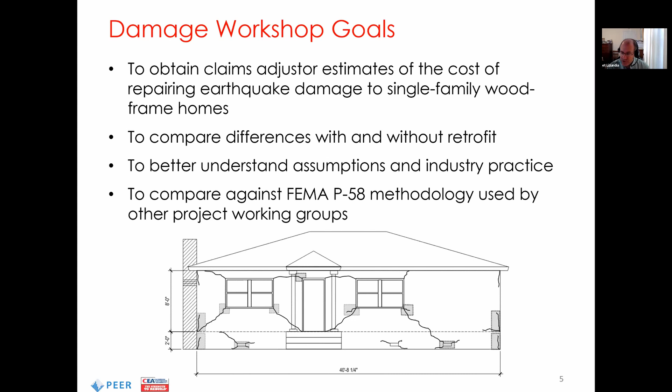We wanted to compare the results if the building had been retrofitted versus not retrofitted. And we wanted to drill down into understanding what kind of assumptions they use, what the industry practice is among their colleagues. And ultimately, we wanted to compare their results against the FEMA P58 methodology, which is underlying the approach that we took analytically.

So in terms of what I'm going to cover this morning, I want to review the scope of the study, what all was involved. We had a key workshop online where we brought everyone together and we talked about issues of differences, and we made decisions on how we were going to address those. Then I'll show you results of estimates and then draw some conclusions and make some recommendations.

So let's first talk about this package, the damage description package that we issued. These were the rules of the game, the instructions to adjusters on what we wanted them to do. And this document grew and grew as we delved more deeply and had more reviews of people.

It covered the buildings, and I'll show you those in a minute, that we were estimating, the damage to those buildings, the different scenarios that were considered, and a very detailed set of assumptions to kind of establish the context and how we wanted things structured.

CEA suggested that we use the Verisk platform, which is common in the industry. We're not endorsing that in any way, but it provided for ease of use and efficiency and commonality amongst the estimators and adjusters so that they were all doing a similar approach.

This all got combined into several things. One was this 106-page damage description package. We also had a questionnaire that we did through Excel, and then we gave them the starting point of Xactimate files to save them time so they didn't have to build the basic geometry of the building in there.

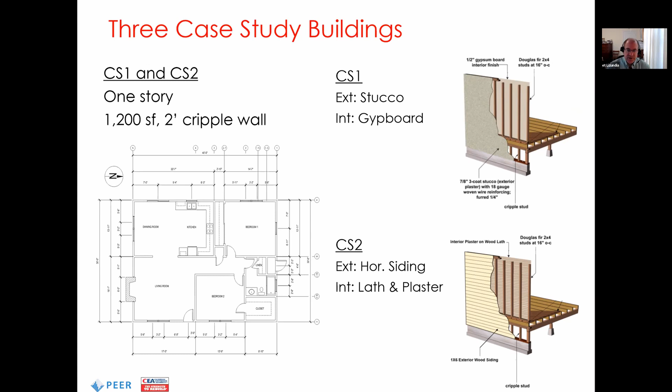We could, though, compare directly other things. So the third building was 2-story, kind of similar in terms of the basic footprint. We added a garage to it. It's got more modern T111 plywood on the outside, and interiors gypboard. We also made it a tall cripple wall to see if that would produce any differences.

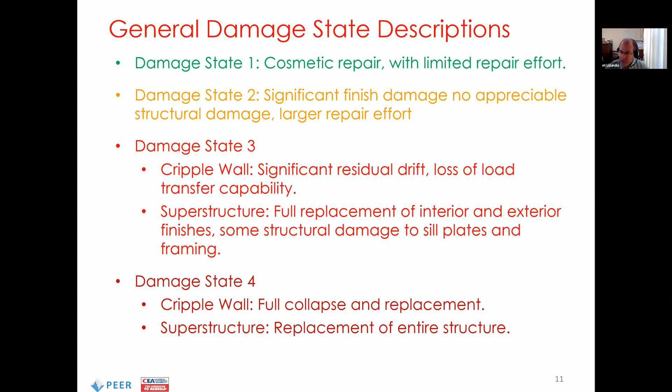For each of these case study buildings, we created 4 damage states, deliberately colored in ATC 20 post-earthquake evaluation colors. Damage state 1 has damage, but it's something that would receive a green tag—cosmetic repair, fairly limited work. Damage state 2 is more significant; you might receive a yellow restricted use tag. We've got a lot of finish damage at that point, but nothing really significant on the structural side. Damage state 3, there's a big jump—that's where we really started having significant damage to our cripple walls. We've got permanent residual drift, we're worried about gravity load carrying capacity, and substantial damage is occurring in the superstructure as well. Damage state 4 was defined as so bad that we're going to replace the building. So you can see how they step up.

With each of those abstract descriptions, we then had detailed pictures in several different ways. So we have these crack maps and spall repair maps where we define the length of cracking, the amount of spalling happening on each exterior facade. We have similar descriptions for interior partition damage—what happens to the floors, walls, tile, MEP systems, a whole series of categories. We tried to include photographs, usually extracted from the literature, to illustrate the extent of how bad that damage was or wasn't.

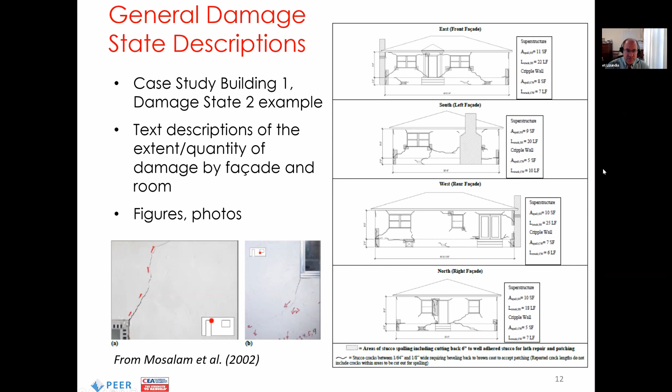So we had that all assembled. We sent it out to our adjusters, and we convened a call with them after they'd had a chance to dip in and take a look and get a little overwhelmed by how much they had received. We took their questions, tried to answer initial ones, and then they were off and running. They prepared their initial estimates and sent them to us, and we poured over them—looking for issues, commonalities, questions, things that could have been clearer, areas where there are differences in the approaches that each adjuster and their firm takes. We had a very successful workshop with a good group discussion amongst a diverse audience on how to address those, and then we kind of redid it.

So there was another round after the workshop with a much more detailed damage description package that described the decisions that were made and how we wanted them to address that. And then we got a second round of estimates back, and we again poured over those, organized them, and processed results.

The scope—I mentioned Chris McDermott was an advisor. We had 10 adjusters who do earthquake damage and many other kinds of catastrophe damage estimating, sort of a powerhouse group. These were, quote unquote, volunteered by their firms with nudging of CEA, and we're very grateful for that—I could not have done any of this without them. In terms of permutations, if we have 3 kinds of buildings, retrofit and unretrofit, and 4 damage levels, in theory there's 24 scenarios we would have gotten estimates on, but some of them are awfully similar to one another, so I combined them to reduce the effort, though it's still a dramatic amount of work.

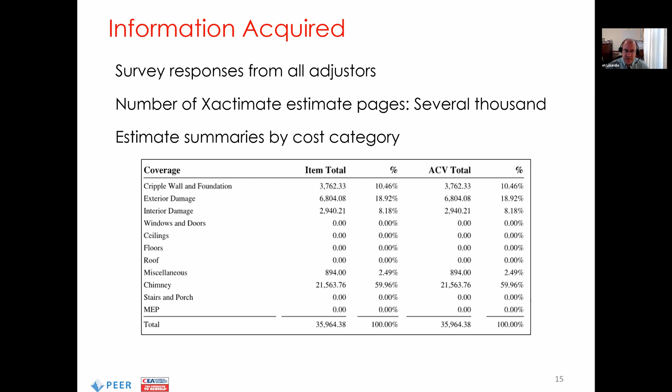Once we had all that information, it was a little staggering. The Xactimate report files are on the order of 30 to 50 pages, depending on the scenario, for every one of those scenarios for every adjuster—so it's thousands of pages. We made a decision early on with Chris's help to combine things into categories that helped us summarize and condense the several pages of detailed work the adjusters were doing. So we had a cripple wall category, an exterior and interior category, windows and doors, ceilings, floors—you can see the list there. That was more helpful for reviewing things between folks rather than at the detailed, 40-page line estimate level.

So what did we find when we brought everybody together and looked at that first round of things? What we saw is that there were some places where our descriptions were on target, no issues, everybody agreed.

There are other places where we decided if you've got stucco damage on the outside, then we're going to take it off, and the water barrier underneath that's exposed is going to be completely replaced and patched. Maybe even more significantly, if there's tile somewhere, we're going to assume it can't be matched, and that room gets full replacement, even if only a portion was damaged.

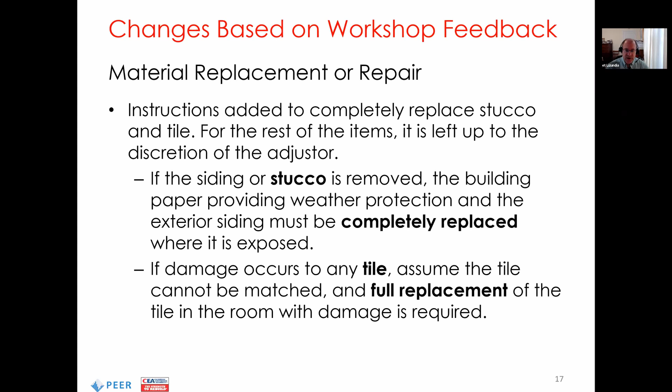That is kind of general industry practice and has a big impact on costs. So even if structurally there's not a lot of damage, the cost of tile replacement can be fairly significant. Leaning cripple walls is a very key aspect to many areas of this project.

We had a lot of survey questions about what would you do in this situation, what would you do in that situation. It turns out there is not industry consensus on this, and many adjusters' general approach is to defer to a structural engineer that their firm hires when the damage is significant, and that made things difficult to cross compare.

So we made a decision to direct them to make certain assumptions. We added additional language about what to do in these three damage states to basically tell them what to assume in terms of the repair.

We also had instructions—as a practicing structural engineer, I routinely assist and review cost estimates for my projects. Those aren't buildings necessarily that are built yet; this is an estimate in the future. So typically costs are escalated to the midpoint of construction.

This turns out to be a very unfamiliar concept in the claims adjuster world. They just don't use escalation, it turns out. They are doing things in real time. They might have multiple estimates as more information comes in, and the costs are done at current dollar values. That was news to me—I didn't realize that was the approach, and it shows a pretty fundamental difference between industry groups in how they deal with inflation and escalation.

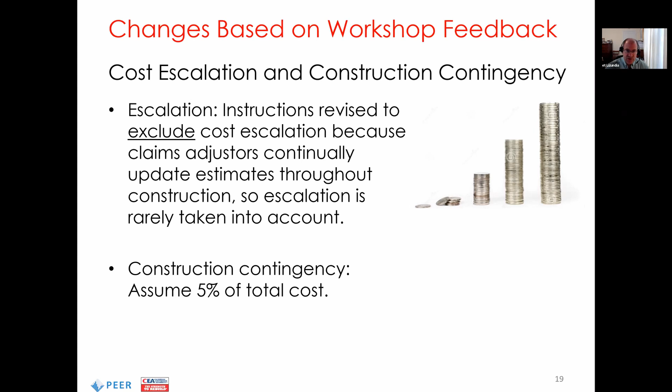We also made decisions about what contingencies to assume that might come up with changes when you get into construction. We had advice about how long the building was going to be out of commission, depending on the damage state, ranging from 2 weeks to a year—a pretty dramatic difference between damage state 1 and 3, for example.

We made assumptions, or directed them to certain things, about architect and engineer design fees, plan check fees, and special inspection, which is pretty rare for a house—some jurisdictions do a little bit. So those were imposed on them. Originally we had asked them to tell us their assumption, and we didn't get a lot of good response on that, so we ended up deciding to define it.

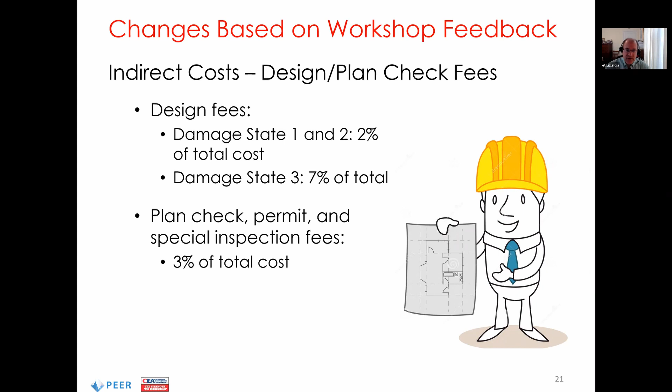A big thing that has grown in California over many years is the cost impact of dealing during repairs with lead paint and asbestos, and I did not appreciate how significant this has become. So we had a lot of debate in the workshop about how to do that, and we ended up making some decisions related to the different damage states based on their experience and what they see.

So these are weighted averages. They certainly see way higher values in some extreme examples than, way more than 10,000. And then they see less, but typically they're dealing with this, and this has become a growing challenge, particularly in California.

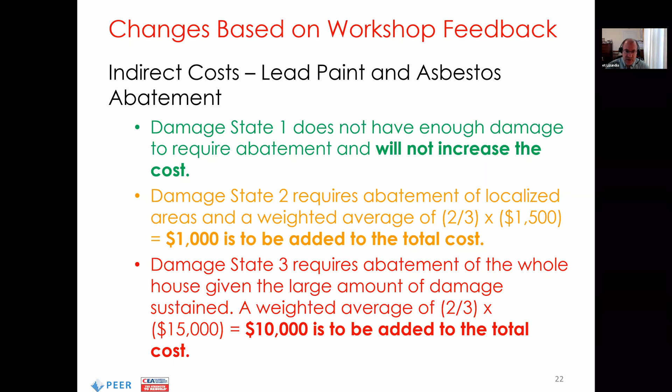We decided in the end to exclude what's called coverage C and coverage D in the industry—personal property and ALE—for simplicity.

Okay, so those, and there were more—that was sort of highlights of decisions we made. But let me talk about results next.

So the first thing that we did is we looked, in my office with the folks who were helping me, at what we got. Despite all of these review steps and instructions, and we had cheat sheets in the damage description package about where to put things, this is hard. I was impressed by how tough it is to be an adjuster, and the challenge and the really intense detail that the programs and the work they do go through about all the very specific choices.

So when you step back and try to aggregate that, and say we wanted you to put that particular thing in miscellaneous rather than indirect, that wasn't necessarily how they did it.

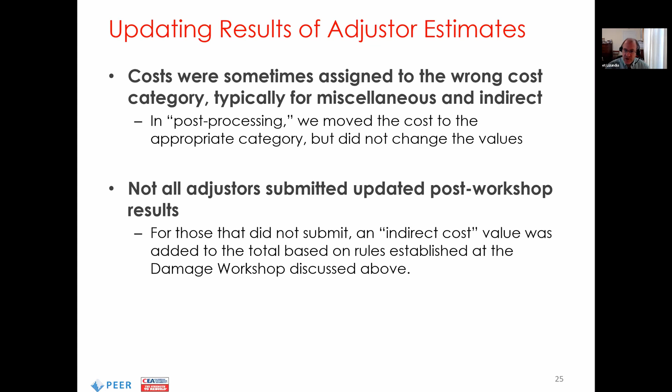So what we did, just to make things more comparable, is we moved values from one place to another, depending on how we had originally intended the value to be located in which category. We didn't change the number, so the bottom line total is the same—it just made it easier for us to compare individual categories. Not everybody resubmitted, so we adjusted the ones that didn't resubmit values to include any decisions on specific things they needed to do with indirect costs in the end.

Okay, so with that being said, here's some comparisons. CS1, that's case study building 1, the 1-story house. You can see damage state 1, DS1, starts at $15 a square foot—these are in last year's dollars—and the replacement value of that house is about $240 a square foot. So not surprisingly, the more damage you have, the more it grows, and it grows fairly significantly with each damage state.

So we actually kind of liked the way we had divided up the damage states. We got a nice variation that really reflected meaningful differences. There are some differences on a dollar per square foot basis between the 3 buildings, but not a huge amount—that was interesting, that even though we had all these variations at a bottom line aggregate level, they're not dramatically different. You can see on the bottom row the mean values of all the adjusters who worked on a particular building type, what they came up with.

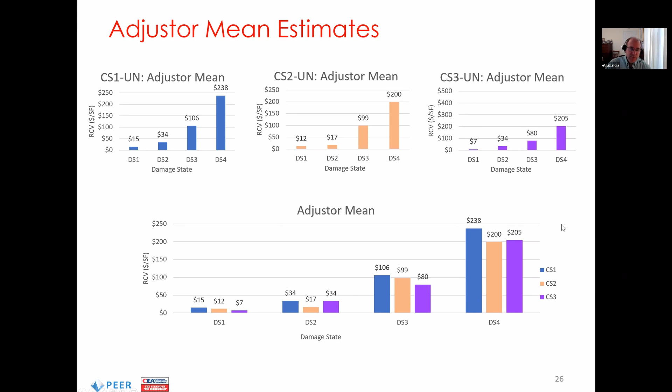So another really important thing we did was compare the differences between what the adjusters were submitting to us versus the FEMA P58 methodology. Dave Welch and Greg Deierlein, who we're going to talk to later, were kind of in charge of that effort. You can see on the right the mean and mean plus-or-minus 1 standard deviation of their work, and how that nicely envelopes the adjuster values. Pretty impressive, really, how similar the ranges were between these, and quite reassuring to us that we were on the right track.

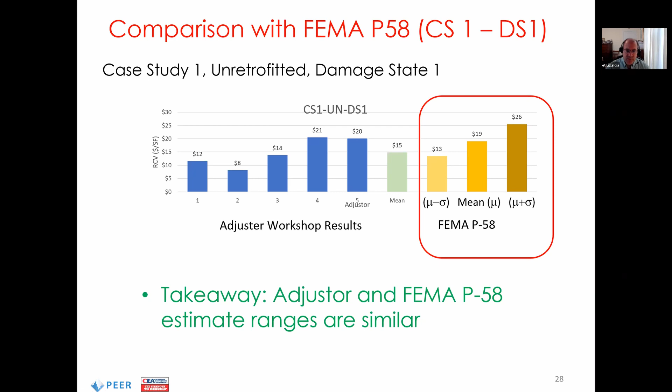So we have coalesced all that information, put it together in data that will be available to any researchers who might be interested. It has 4 primary Excel spreadsheets that compare a whole host of different things and have histograms and summary tables, more information than is in the published report that will also be issued. For those who might want to dig into that, it's available. By prior agreement with the insurers it's anonymous, so only I and my staff know who was who, and we're not giving out the Xactimate files for similar reasons, but there's still a ton of data anybody could dig through.

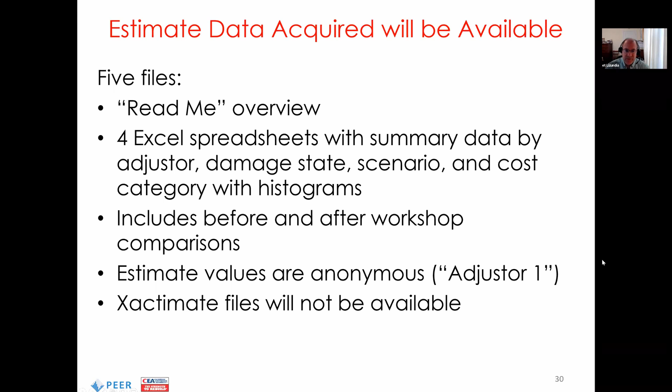So, conclusions and recommendations I'll wrap up with.

In terms of conclusions, as I mentioned before, reassuringly and sort of impressively, adjuster estimates and the P58 were awfully similar. You really have to have detailed estimating assumptions. I thought we were super detailed, and then we had the workshop, and despite all these reviews of a whole host of really talented people, we still needed more. The adjusters were always wanting more to make their job more rigorous. So it's a testament to their professionalism, but it's also a lesson that different assumptions can make a big difference.

I came away feeling that the world I typically live in as a design professional and the cost estimates I do, as opposed to what the claims world does, as opposed to what academic researchers do and what catastrophe modelers do—it's almost like we're all talking a bit of a different language with different terms. The fact that some adjusters had never even heard or used the word escalation was kind of amazing to me, and there were other things. So I think a project like this highlights the commonalities and the differences, and helps each of us understand one another better.

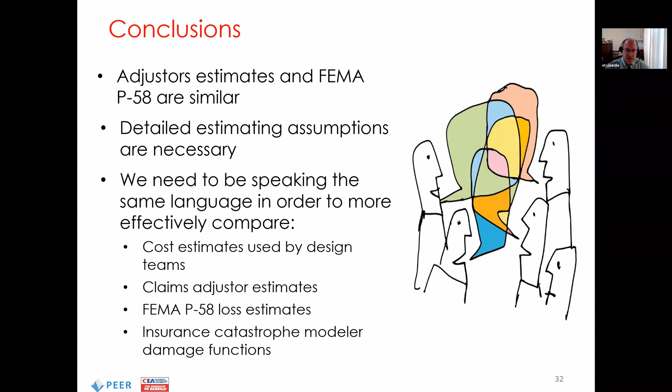So you got to be specific. Working with the modelers who were on the online workshop, we decided to exclude demand surge—the kinds of things that change when there's a lot of damage happening after an event. Catastrophe modelers, as I understand it, do that separately anyway.

So we took that out as an assumption. Things that will occur in some small subset of buildings, like legal fees, radon, and mold, we also excluded. So in some ways what we have is a bit on the lower bound side, but you can't cover all of these different permutations.

In terms of recommendations, we felt the only real significant area where we wanted to drill down, and where we were able to use the adjuster values to do that, was with the lath and plaster estimates we got. In our report and the work we did with Greg and Dave, we were able to cross-compare adjuster values on lath and plaster versus gypsum board. That was a great benefit, as it got specific on how they were going to deal with that across many permutations.

Again, and I keep saying this, but I want to say it once more: when you do this, you need to be really, really specific about what you're assuming. Over and over it was brought to bear that you just can't do things without having this be clear—it will be apples to oranges by definition. So when you look at future projects, or as people are crafting projects, I really want people to have 100-page descriptions of assumptions, because if you don't, you're just kidding yourselves about whether you're actually getting good information.

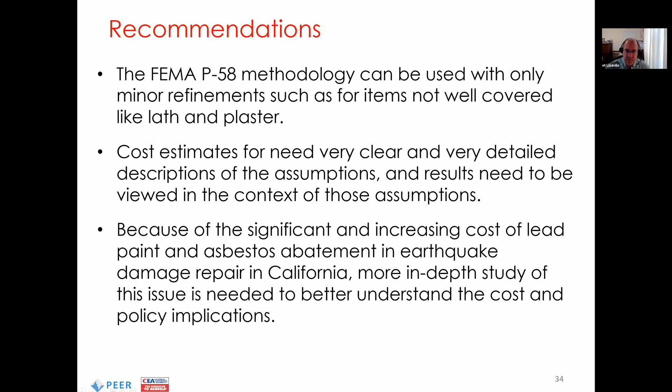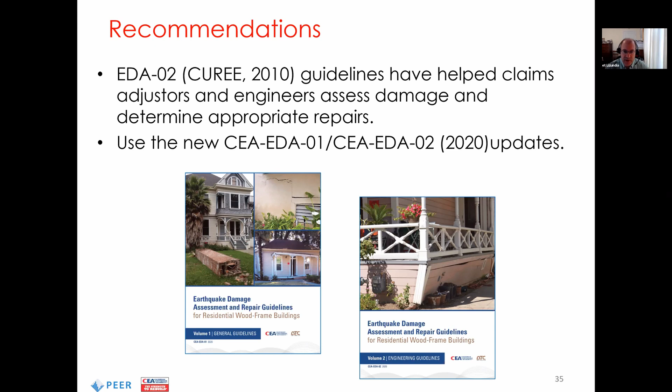I'll put in a plug, but it's a well-deserved one. One of the rules of the game for our instructions was that the EDA 2 guidelines that CUREE produced a while back are definitely industry standard practice, and we said follow that wherever possible—that's your guide. That's been out there a long time, and a recent ATC project updated these into two wonderful new documents. So those will now become the new industry standard, and we definitely encourage that.

Remember, I mentioned we couldn't get real agreement amongst the adjusters on how they dealt with leaning cripple walls—at what point they repaired them, at what point they jacked them, at what point they replaced the cripple wall itself with the building up on shores, and at what point it was so bad they ended up having to replace the whole building. So that's an area where more detailed work between engineers and adjusters needs to be done.

Finally, other people have said this for sure, but I really believe it's true: trying to get it to happen is the challenge. Insurers have payout information that is, of course, proprietary and of great value to them. But if we had that in some anonymous way—what's actually paid out—you can imagine how valuable it would be to improve FEMA P58 or similar projects. If there's a way we can work together to share some of that information, I think it will benefit everyone, leading to better research, better analysis, and better pricing of insurance policies.

So I will end here. I think I'm on time, and I'll turn it over to our next speaker.

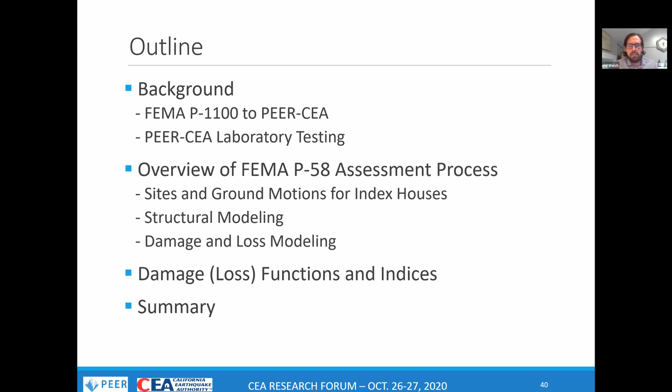So just as a brief outline, I want to transition a little bit between the FEMA P1100 document serving as the retrofit criteria for this project, and then moving into the objectives of the new project. My portion of the talk will go over the FEMA P58 process, as Bret somewhat introduced when discussing the workshop. I'll show this more graphically as I go through, to give a bit of the background behind this whole process. Unfortunately, I won't be able to get into every single detail, but we do have a 400-page report that has every input value and assumption made for all this work, so anyone interested in the nitty-gritty can obtain that once it's published in the near future. After going through that, I'll turn it over to Greg, and he'll talk about some key results and findings, and then conclude our talk.

As Kelly mentioned yesterday when talking about the ATC 110 project and the FEMA P1100 document, this represents the engineering solution to the crawl space vulnerability problem, and is a stepping stone where we have the PEER-CEA project, aiming at quantifying performance as an intermediate step towards the bigger picture of implementing more of these retrofits and reducing the vulnerability of these structures. One key difference between these two projects was that the development of the retrofit guidelines focused mostly on a very high seismic demand, probability of collapse at the MCE level. This used the FEMA P695 procedure, doing incremental dynamic analyses and the appropriate adjustments to estimate the probability of collapse at the MCE level event. Then in addition to probability of collapse at the MCE level, we considered R factors with different considerations rather than just the nominal P695 collapse probability.

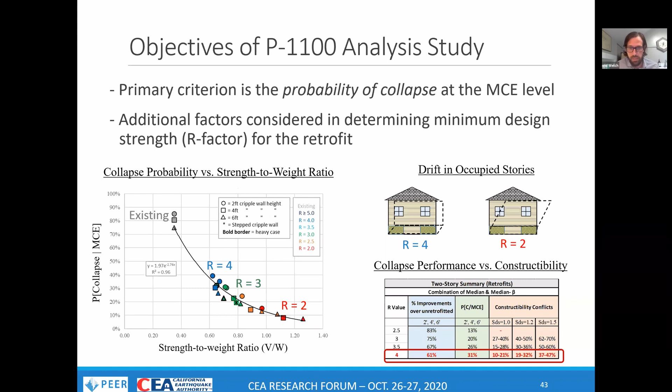This relied heavily on understanding shifting drift into occupied stories, and importantly, the constructability of these different retrofits, trying to make a balance between the collapse reduction and how many of these retrofit details will actually fit in most houses. So that's just a little recap.

Okay, and then so now, as everyone here for the last two days knows, for the new project we're attempting to develop loss functions to quantify the benefits due to retrofitting in terms of reducing the risk of collapse and economic losses. The main question shown in the top bubble is trying to understand how the removal of the cripple wall vulnerability due to retrofit changes the risk of loss.

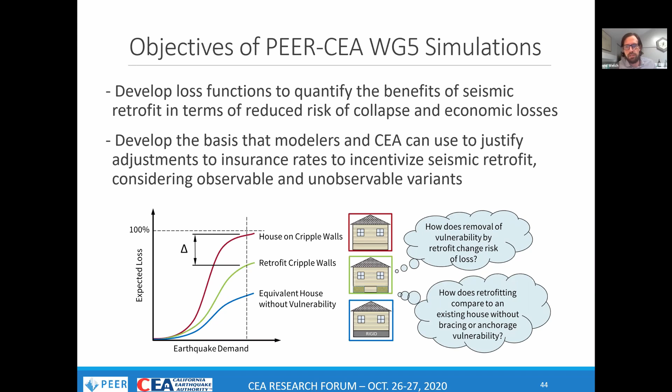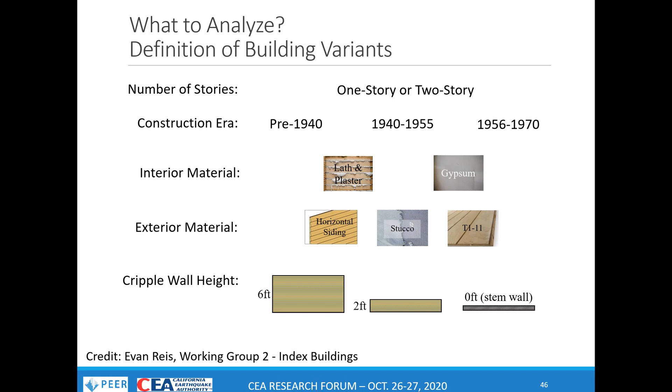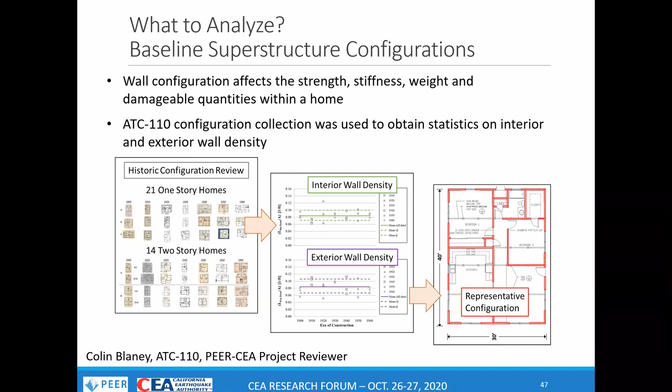We obviously made use of a lot of the testing that you heard about yesterday, which was primarily focused on looking at the behavior of the cripple wall. There's been quite a bit of testing on wood frame structures in general, but not as much on the cripple wall, so won't go over all the details again, but making use of the smaller individual wall panel tests down at UCSD, and then the larger component tests that included both the cripple wall and the first floor above, run at Berkeley.

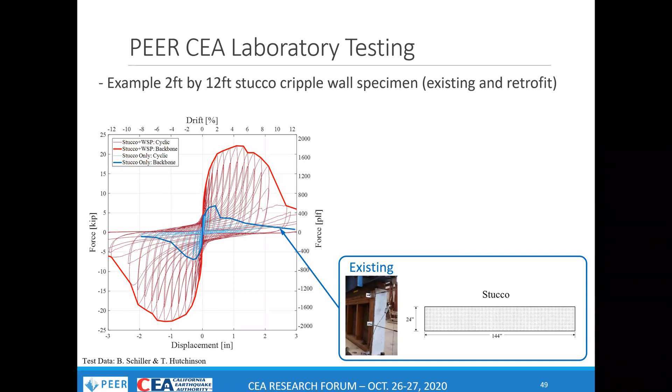This is a repeat of maybe a slide you saw yesterday, but just showing the dramatic improvement you could get in terms of the cripple wall behavior between the retrofitted and unretrofitted cases. This is one example, but these were things that David went through very carefully in developing the computer model, or the parameters for the computer model we used in OpenSees. You see the case of the existing with the stucco, and then when we add the wood structural panel behind it, the dramatic increase in strength that you see. In fact, the increase would be even larger if we showed you the wood siding case, because the wood siding was the most vulnerable cripple wall.

You heard yesterday about the ground motions that Silvia and Yousef Bozorgnia developed. They actually looked at 10 sites, but we picked out 4 to focus on. Those are shown here: low seismicity Bakersfield, higher seismicity San Francisco and Northridge, which are somewhat comparable, and then the worst site of all, San Bernardino.

Apart from the ground motions and characteristics at these different sites, why these were picked relates to how they correspond to the P-1100 retrofit. For the typical plan sets, shown on the right, there are 3 standard retrofit designs depending on the design basis ground motion—at the lowest level, a design SDS, short period spectra of 1G, going up to 1.5G. Those 3 tiers represent the amount of retrofit.

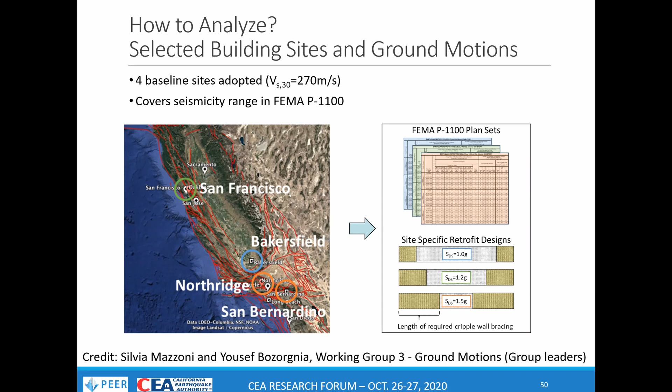While the existing houses we looked at were the same at all 4 sites, the retrofits of the houses were different. The buildings in Northridge and San Bernardino used the highest retrofit, 1.5G. In fact in San Bernardino the seismic hazard even exceeded that, but that was the maximum amount of retrofit available. Going down to Bakersfield was at the lower end—in fact there, the retrofit was a little over-designed for the site.

The ground motions themselves picked up the characteristics Silvia described. We used suites of ground motions, 10 stripes if you will, of different intensities conditioned on a short period, conditioning period of 0.25 seconds, capturing the spectral shape as it changes going to higher and higher intensities.

This shown on the right is the example for the San Francisco site. Let's see if I can go forward.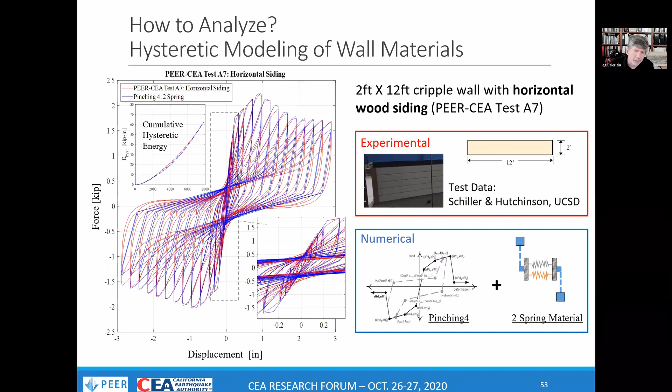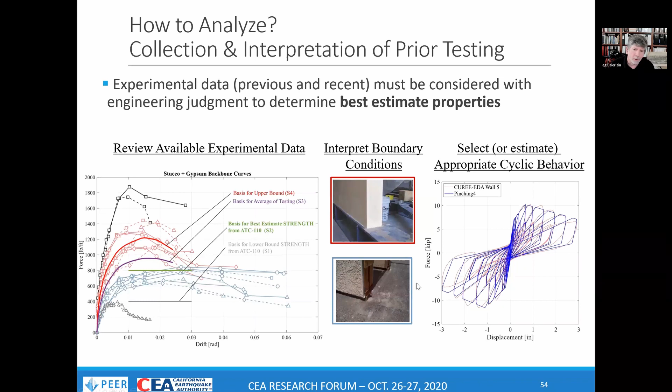This gives an example of some of the data that was harvested. Kelly Cobeen helped quite a bit on this because a lot of this data was collected as part of the prior ATC project, going through past test reports, again mostly for superstructure material. There's quite a bit of variability there, so we used judgment to get characteristic values, looking at the variation of expected strength, and did our best to develop the backbone curves and characterize the hysteresis behavior.

Okay, the next thing we had to do is to look at damage. So we've gone through the computer modeling, and that was just the tip of the iceberg. But then once we run analyses and we get deformations, that is drifts that are in the cripple wall or drifts in the superstructure, then how to relate that to damage in the structure, and then finally to the cost.

And for this, we really utilized all the work that was done previously that's in P58. So there's a database of many different types of materials, gypsum, wallboard, lath and plaster, exterior, and the different damage states we have there describing, on these plots you see drift ratio versus the probability of being in different damage states.

So we went through those carefully. We made some modifications based on some of the data that came out of the CEA testing, in particular large-scale tests that were done at Berkeley. So some adjustments to these damage functions from P58.

Okay, and then the next thing, given the damage and the damage states in each of those walls, then to go to cost. And here again, we relied on pulling out data from P58. There were cost estimators that contributed to those functions.

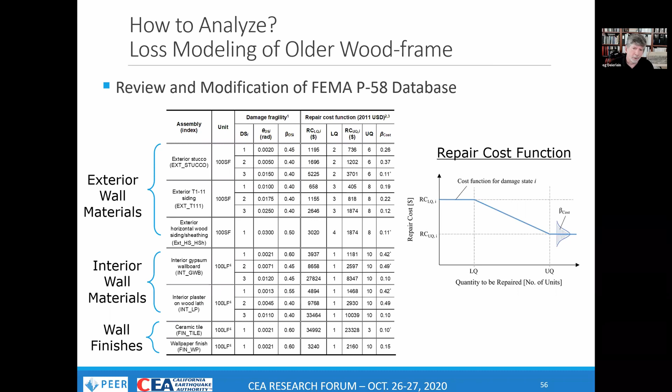So we have, for the different damage states, in exterior walls, interior walls, and also looking at different interior wall finishes, whether it's kind of a standard finish or whether it's a high-end ceramic tile finish, say representing the bathroom and kitchen spaces in the building. Okay, so those are the cost functions we started with.

And again, we kind of went through those carefully. One of the things, if you're familiar with P58, that deals with a whole spectrum of buildings of different size, that thinks about the number of units that are in a house. In other words, how much material is being replaced. So we kind of went through those carefully and made sure we made adjustments to them that were appropriate for the index type of houses that we have.

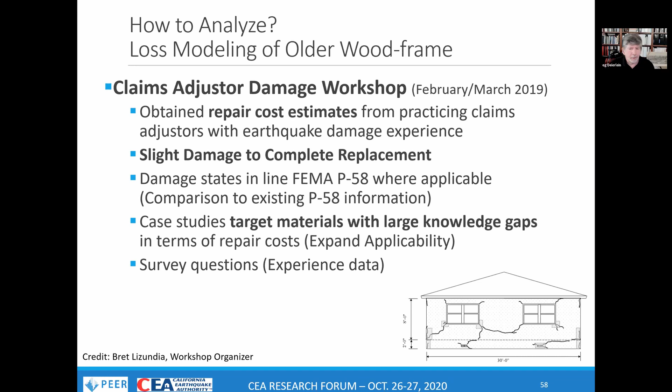Now, as Bret mentioned just previously, we had the detailed claims adjuster damage workshop. So that was like a totally independent way to assess these repair costs. We began with the ones from FEMA P58. And then working with Bret on this workshop, we kind of hypothesized these different buildings and being in different damage states. We then calculated losses, repair costs based on P58, and then comparing it with what came out of the adjuster workshop. And these are just some examples.

We have these documented in our various reports, but this is showing one of the 3 case study houses that Bret introduced. And it's just showing the results, so these are looking at the 3 damage states, going across this plot here, 1, 2, 3, 4, 5 on the bottom. Those are 5 different adjusters. The percent replacement cost is on the vertical axis. And the 3 bar graphs in each set refer to the 3 different damage states.

So the ones shown in gray color are the adjuster values from the 5 adjusters, and then getting mean values of those. And then we compared that to the P58. So you see the mean from the workshop shown there for those 3 different damage states. These losses, as we go through, are all based on percent replacement cost of the house. And then comparing that to the numbers we had from P58. In general, we were pretty pleased that the P58 numbers, totally unadjusted, tended to agree pretty well with the data from the adjusters workshop.

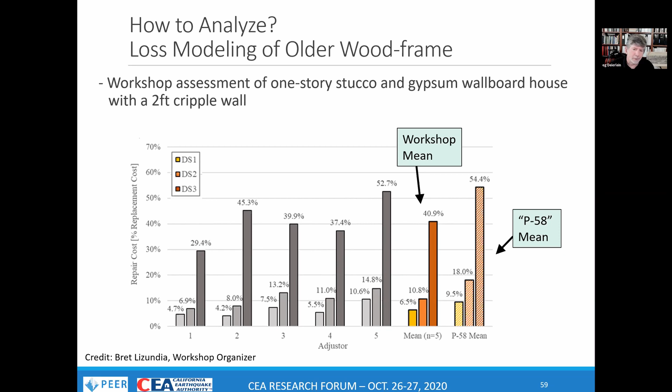And you also see in this picture, which was representative of the other 2 houses looked at as well, that just between adjusters, there was quite a bit of variation in how they would judge the losses. So I think when you look at the P58, while the mean could be somewhat different than the mean from the workshop, it's right there in the mix in terms of what adjusters would have estimated for that house.

Okay, and then another aspect was to look at the replacement value of the house, because the P58 numbers and from the adjuster workshops looked in terms of real dollars in terms of what different repairs would cost. We then, when we looked at our damage functions, normalized all these in terms of percent replacement cost. So here again, we looked at replacement costs for the 3 case study houses, and roughly you see the numbers there all around $200 per square foot.

So in fact, that's what we used going forth when we looked at, say, the loss due to collapse of a house. That would be the full replacement value, $200. And also when we took the repair costs from FEMA P58 and normalized them, we feel this $200, while it might not represent the cost of a house in downtown San Francisco, it's commensurate with the estimates of the repair cost in an average sense.

Okay, and that's just showing the workshop mean and the P58, what we're assuming.

Another big assumption we had to make, and it was quite a bit of discussion within our group and with our review committee, is what's the amount of loss if you have the cripple wall collapse, because there was nothing in P58 that covered that. In fact, even talking to the adjusters, not a lot of information back on that. But there is some work previously, the CUREE Caltech project, Keith Porter and others worked on this, that had kind of a mean value predicting roughly 33 or 1/3 of the replacement value.

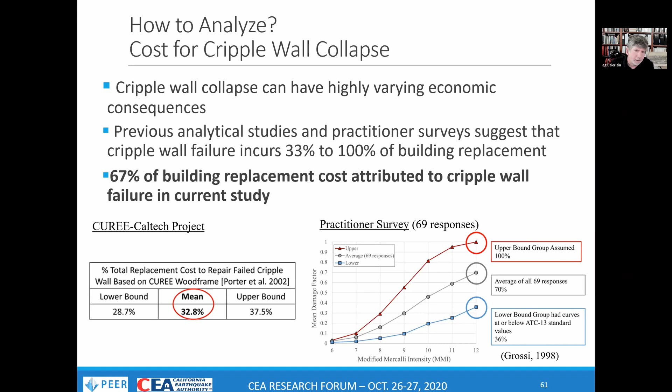Okay, so that summarizes Dave's first part of the talk. I probably went through it a little quicker, maybe leaving out a couple of details, but maybe Dave could get back on the phone if there's questions later.

So I'd like to transition to look at some of the results we have from these detailed analyses. There's quite a bit of data that was generated. In total, we developed 250 damage functions. That's basically 125 pairs of damage functions - the house with and without, or the original house, and then the house with retrofit. So there's 250 of those damage curves.

Behind the scenes on that, there's quite a few analyses. For each of those 250 damage curves, we did the OpenSees nonlinear dynamic analyses, 3-dimensional, with 10 stripes of earthquake ground motions with 45 ground motions per stripe. So in total, there's about over 100,000 nonlinear dynamic analyses that were done. You could probably double that number if you include some of the parametric studies or interim results we did along the way.

And then from those, the results of those nonlinear dynamic analyses fed into the P58 calculator, which is doing Monte Carlo simulations on the damage realizations and the loss realizations, so there's millions there. What enabled us to do all these analyses was building a computational workflow. I won't go through all the details here, but the runtime itself was many months. And all of this data, apart from the 400-page report, has been compiled and turned over to CEA.

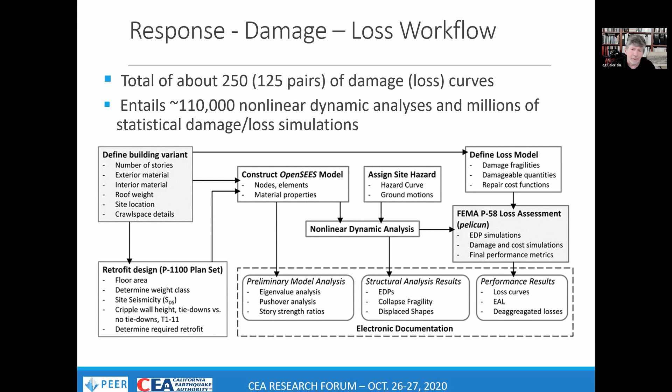So I'll just be, in the next few slides, summarizing some highlights from the results, certainly not all of the 125 pairs of damage functions.

The one I was going to start with here, as an illustrative example, this is a 2-story wood siding building, as you've seen from the little graphics. We'll look at the existing and the retrofit condition. This is a post-1955 era, which means it's going to have gypsum wallboard interior, has 2-foot cripple walls, and this one is located in San Francisco, which is going to dictate the strength of the retrofit that we put into it, in addition to using, when I look at expected losses or the design level ground motions, the San Francisco site.

This 2-story example with wood siding is one of the more vulnerable houses that, on the flip side, benefits the most from the retrofit. As we look through some key performance, we'll look at the probabilities of collapse, the damage functions themselves - the expected damage versus the ground motion shaking - and then we'll also look at some statistics, expected annual loss or average annualized loss, and also the mean loss at a 250-year ground motion shaking intensity. This is kind of a characteristic one. It's a little bit less than the design value ground shaking, but it might be one if you're looking at resilience of a community, that 250-year intensity.

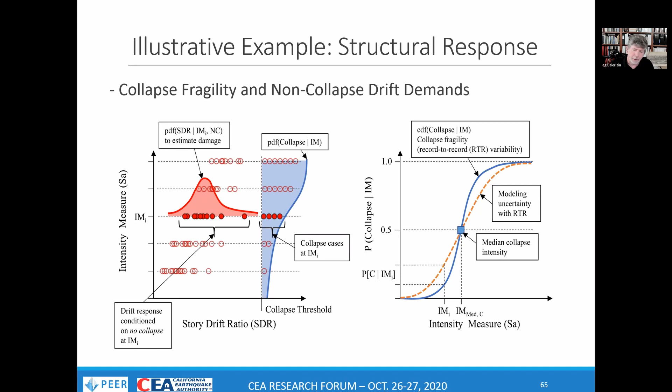It does not happen as much if we look at the T111 siding or in the stucco. But the wood siding, once we retrofit that cripple wall, tends to push the collapse up, but admittedly it's at a much lower probability level.

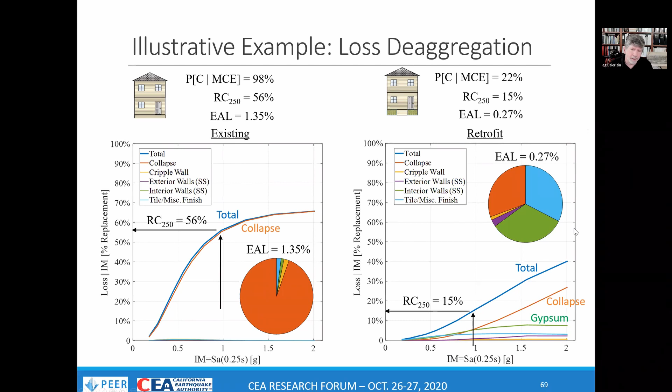And you see in those little pie charts shown there, in the existing case, pretty much all of that loss is associated with the collapse of the cripple wall. Whereas if you go to the retrofit case, it's kind of a mixture of some collapse in the first story, but also other cases where you're just going to have damage to both the interior and exterior wall, shown in blue and green, for the kind of damage in the non-collapse cases.

Okay, so if we look at a slightly wider group of houses, we're going to compare some 1- and 2-story houses with wood and stucco exterior. We'll start out by looking at all the post-1955 era. So all of these houses shown in this segment will be gypsum wallboard interior with 2-foot cripple wall, and we'll stick with the San Francisco site for this example, looking at those same 3 metrics.

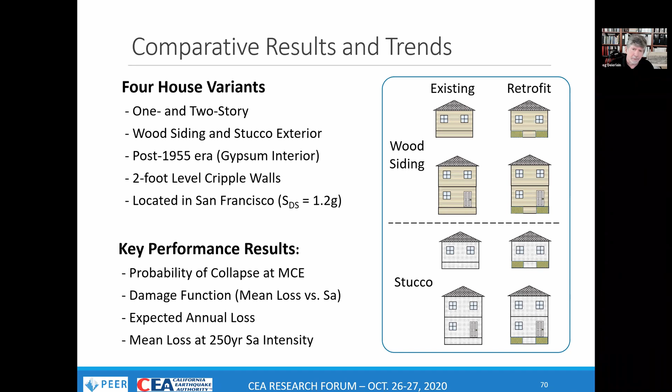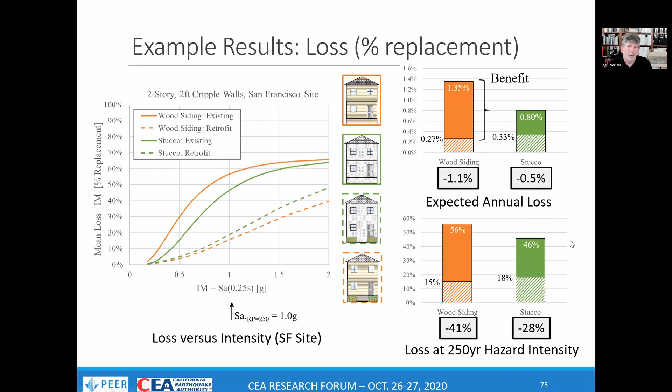We could see the dashed curve showing the benefit that we get with the retrofit. Again, like we've seen with the 1-story house, the benefit for the wood siding, shown in the orange bar plots on the right, is about twice the value in terms of expected annual loss. It's about 60% of the value in terms of the loss at the 250-year hazard, but still a significant savings for both cases by putting the retrofit in.

Okay, now I'd like to shift gears and look at a few other parameters of the index buildings we looked at. In the next few slides, we're going to be comparing the 1- and 2-story houses with wood siding and stucco. Again, stucco shown with the white graphic, wood siding with the beige. But now we're also looking at 4 different sites: Bakersfield shown in blue, San Francisco in orange, Northridge site in gray, and San Bernardino in yellow.

In this graphic, we're looking first at the pre-1945 houses. What's different here is that the interior walls are going to be plaster, and the big difference is that plaster walls are a lot heavier than the gypsum interior. So this tends to make the houses more vulnerable.

This is looking at the probability of collapse of the houses with and without retrofit under that 250-year ground motion. You can see for the high seismic sites, not Bakersfield but the other 3, we tend to get pretty high probability of collapse for the existing cases, and all of those are pulled down quite dramatically by virtue of the retrofit. The one outlier is a bit Bakersfield, which has lower seismicity, where the unretrofitted cases aren't quite as vulnerable, still vulnerable against collapse, but by the time we put the retrofit in, it's a little bit over-designed for Bakersfield, so the probabilities of collapse under this ground shaking get very low.

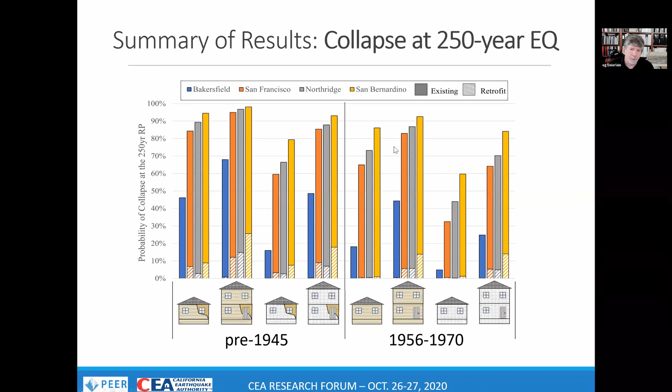But you can see the same kind of trends between the pre-1945 and the 1956 to 70 houses. The collapse probabilities in general go down, both for the existing and a little bit for the retrofit.

That was what we were just looking at, collapse under that 250-year ground motion. Now if we look for a minute at collapse under the maximum considered earthquake ground motion, this is more the code safety level 1. Again, we're looking at the pre-1945 and the more modern houses at the 4 sites.

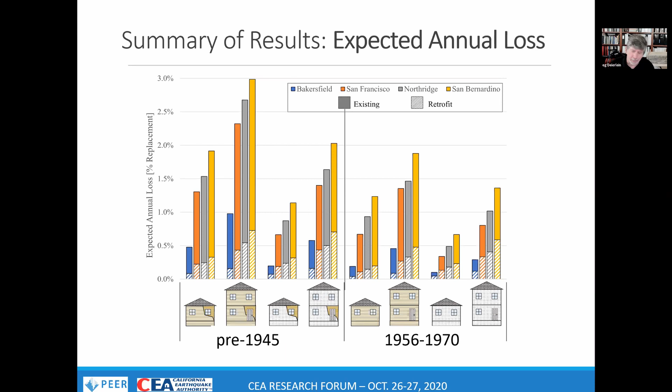So a couple other parametric studies we did was to look at the effect of cripple wall height, because part of the discussion we had early on in this project was how many variations of this index building to look at, and also whether those variations could be tracked through, say, an insurance market - that is, if an insurance policy is out there, would it differentiate houses between the height of the cripple wall or between materials? So we wanted to understand some of these parameters.

What's shown here, I'll just show it for the two-story example, is the damage functions for the two-story wood siding house with a 2-foot cripple wall versus one with a 6-foot cripple wall, in the unretrofitted and the retrofitted condition. You can see here what's interesting - a little bit counterintuitive at first - is that in fact the taller cripple wall, this is a uniform cripple wall height around the perimeter,

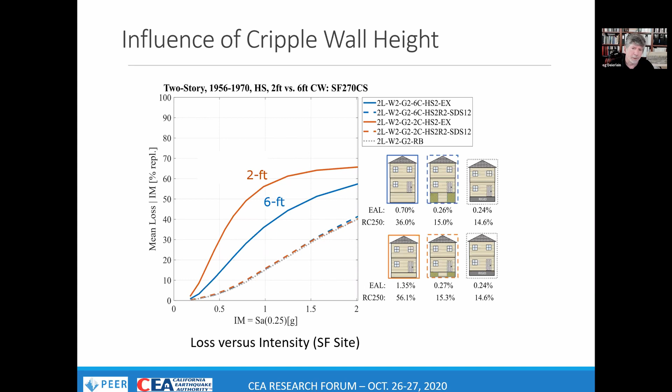Now, if we just compare the effect of cripple wall height for the houses at different sites, we see the same trend coming through as was shown in the damage functions. Here we're looking at the expected annual loss for the pre-1945 houses. The left set is shown for the 2-foot cripple wall with and without retrofit, and the right set is shown for the 6-foot cripple wall.

If you look at the unretrofitted case, you'll see generally less losses for the 6-foot cripple wall. But when you look at the retrofit cases, it's roughly commensurate for the 2 and the 6 foot.

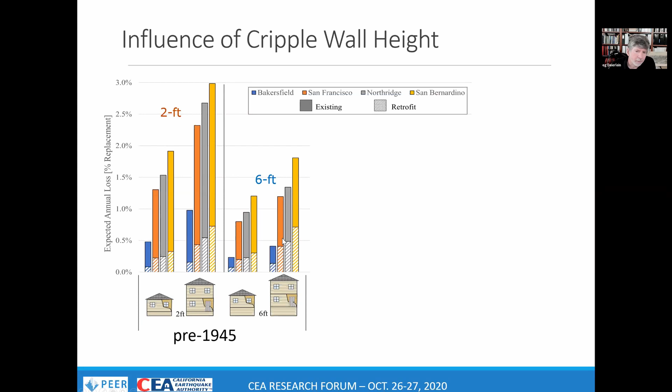Now, in terms of why the 6-foot cripple wall turns out to be less vulnerable than the 2-foot one, it's from structural behavior. There's a geometric stiffness, the so-called P-delta effect, that tends to be inversely proportional to height. So when you have a shorter cripple wall, for a given weight of a house, you have a larger negative stiffness associated with these P-delta effects.

Also, if you look at the wall failure mode and the ductility of the walls, it turns out that the 6-foot cripple walls have more displacement ductility than, say, a 2-foot one. And if you look at earthquake displacement demands, it's not just forces from the earthquake, but the displacement demand. The taller walls tend to have a little more ductility, so a given earthquake displacement demand doesn't do as much harm to them as for a shorter wall.

I should point out that the trends we're seeing here for this wood siding were also true for the other variants, if we looked at stucco and so forth.

And then there's a whole other number of factors one can consider. This cripple wall height is just one of them. You could think of the condition of the house and the foundation. In general, we're looking at houses that are in reasonably maintained condition. We're not looking at a case of a totally deteriorated foundation.

There's other variability that can occur in houses. Roof type is one of those, but you could imagine flooring and other aspects that could, for any individual house, be different than these indexes we're looking at, the index buildings. The quality of interior finishes could also affect the repair costs. Again, we've kind of gone with average values here.

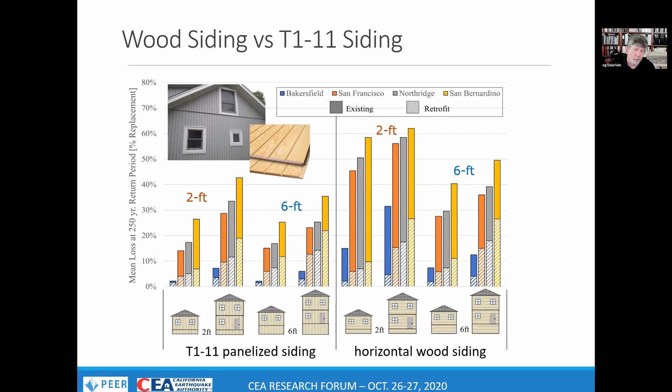If you think about the three exterior finishes I've talked about—horizontal wood siding, stucco, and panelized siding—the panelized and the exterior stucco probably perform more similarly compared to the wood siding.

Okay, the last thing I'd like to look through is the stem wall variant. So as opposed to the cripple walls, where the cripple wall is wood framing with either stucco or wood siding bracing it, the stem wall has either a raised concrete or masonry wall, and the first floor framing sits directly on top of that.

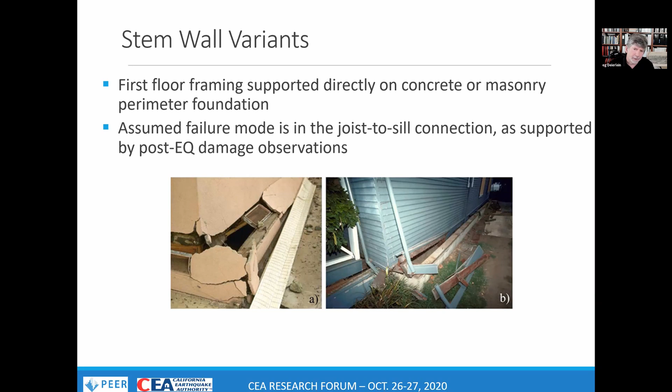You see some examples of the failure modes that have occurred in stem wall houses. One of the assumptions we made, after looking at some numbers and damage reports, is that for these stem wall houses, the failure mode is really going to be a damage and sliding type failure between the first floor joists and the sill connection. So the failure is not the sill plate sliding off of the masonry or concrete wall, but rather the failure between the sill plate and the joist framing above that.

One of the things we had to develop for this, apart from all the modeling we did for the cripple wall house, was how to model that kind of sliding damage failure between the joist and the sill plate. Basically we have a sliding spring there where the resistance is provided by two things: the toenail between the joist down into the sill plate, combined with friction, which is just the weight of the exterior walls sitting on there providing some friction resistance.

We also had to develop damage functions, because this was a damage state not recognized in FEMA P58. So we have three damage states. The first two are when you have a moderate amount of sliding at that interface that can be repaired. Damage state 3 is when you get enough sliding to actually slide off the stem wall, but we felt that wasn't as dramatic a damage as failure of the cripple wall. So we have a dollar amount associated with that damage for all three states, carried through the calculations.

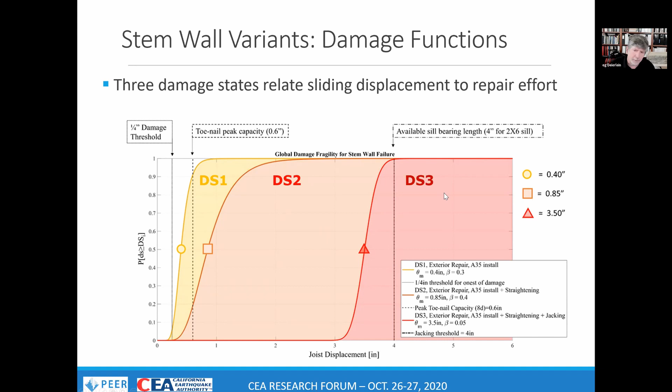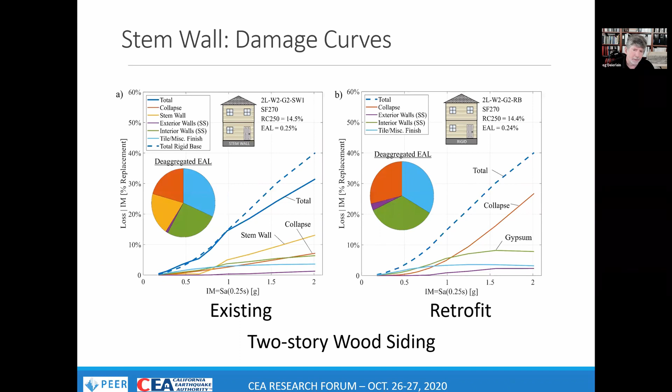When we retrofit the stem wall, we actually push all the damage up into the superstructure. For these two-story houses, there's still a vulnerability at that first floor framing, because it's carrying all the way to the second floor, so we still get a fair bit of damage there. It's kind of a toss-up between the two as to how much that retrofit is helping, but it really depends on the strength of the superstructure. This is a topic we think could use further research, characterizing that sliding failure at the stem wall in addition to the strength of the superstructure.

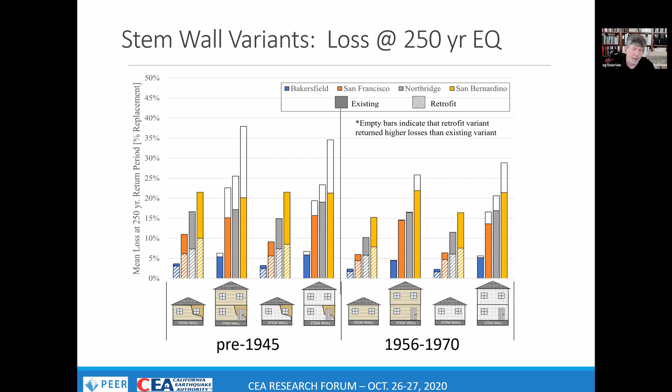This is comparing the losses at the 250-year ground shaking for the pre-1945 and the more modern houses. Again, the pre-1945 tend to be more vulnerable because of the heavy superstructure, and we see clear benefits occurring in the one-story houses. For the two-story houses, it's more of a trade-off, because of the inherent vulnerability of the first story that's not affected or improved by the retrofit.

Okay, so I'd just like to wrap up in a couple of slides here. There's a lot of data and information we showed, but just some general trends — I can't attempt to summarize a lot of the statistics from the different houses.

If you look at the unretrofitted cripple walls, I think what came out of our studies is consistent with intuition. Houses with wood siding tend to be worse than houses with stucco or T1-111 siding, because of the lower strength of the wood siding. Two-story houses tend to perform worse than one-story when unretrofitted, just due to the greater weight of the house. That also translates even more — the older houses with plaster interiors are worse than the houses with gypsum wallboard.

The shorter cripple walls were actually a little worse than the 6-foot walls. In terms of the greatest benefits of the cripple wall retrofit, the wood siding two-story case has the best benefit.

But even in all of the stucco cases, there's quite a bit of improvement, and again you tend to find more benefit for the two-story houses. As you look at the losses in terms of percent replacement value, remember that the two-story house replacement value is twice that of the one-story, so even if they have comparable percent replacement costs,

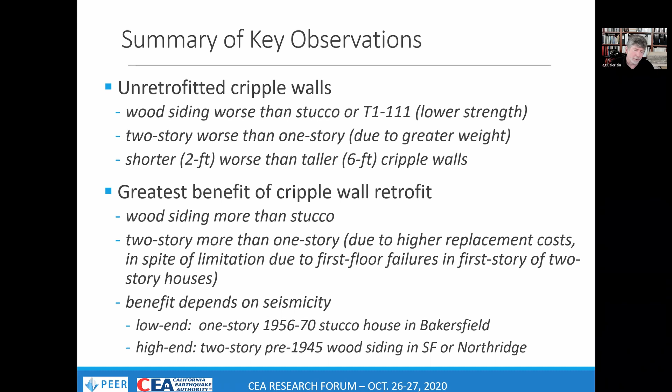that for the two-story translates into more dollars. And of course, the benefit depends on the seismicity. At the low end, if you looked at a one-story, more modern stucco house in Bakersfield, the retrofit's a pretty marginal improvement. But on the other hand, if you go to the two-story wood siding in a site like San Francisco or Northridge, that's where the benefit is the largest.

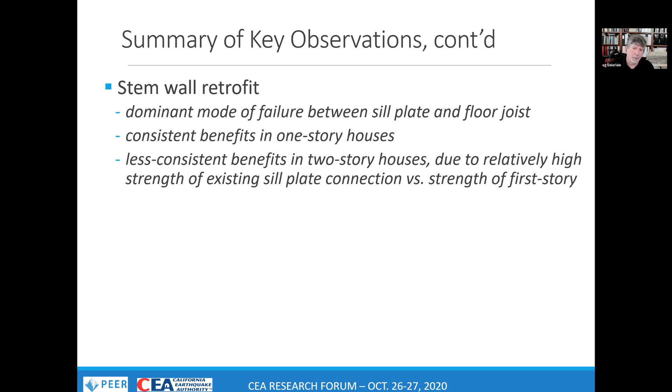A couple other conclusions or observations. The stem wall retrofit I described were the dominant failure mode we're assuming, between the sill plate and the floor joist. We showed consistent benefits in the one-story house. For the two-story house, I think that's an area that could, at least based on our results, not show a clear benefit, but that could be subject to further review and further testing of that sill plate connection. The last thing - in the next segment we're going to talk about future research studies, but briefly,

if we look at the study that Dave and I did with the information from everybody else, there's clearly more opportunity to validate the results we've gotten through post-earthquake, a systematic look at post-earthquake reconnaissance, what the damage claims review shows. We could improve our modeling with data from both field and laboratory testing, maybe testing of existing houses that might be slated for demolition.

Understanding better the inventory of the building stock - we saw quite dramatic differences in terms of losses depending on the finished materials in 1- and 2-story homes, but just to understand better for California as a whole, what is the building stock that's out there in the different regions of seismicity.

Finally, as I mentioned, we developed 125 pairs of these damage functions, and we didn't even look at all the parameters one can look at. You could imagine in the future trying to characterize these in a more parametric sense rather than having discrete curves, other ways to parameterize these, or perhaps have a statistical model that can facilitate looking at large inventories of buildings. Okay, I think I'll end it there.

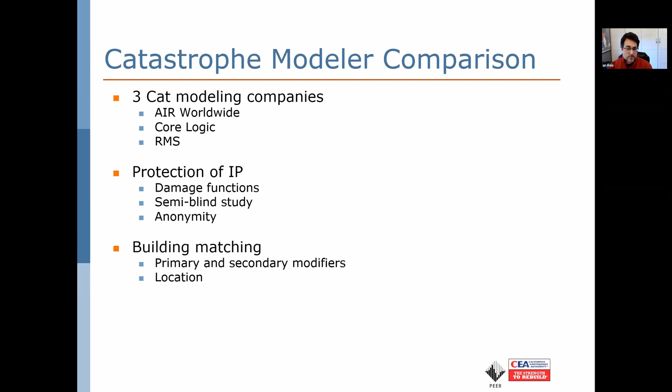So the way these industry loss models work is they do something similar to what we did. They have modifiers on their buildings that represent the characteristics of the house, just like we did—1-story, 2-story, wood, stucco siding, ages. These are the things that obviously affect damage.

Now, when we evaluated the buildings, we of course used analytical modeling, trying to represent in computer format the characteristics of those buildings. The insurance modelers typically use empirical data. So they will gather empirical claims data, and they will bin it into age groups and stories and these other types of modifiers. There are certain modifiers which are essential to get, and those are called primary modifiers, and they typically have the largest impact on performance, and they're the easiest typically to obtain. I'll describe those in a second.

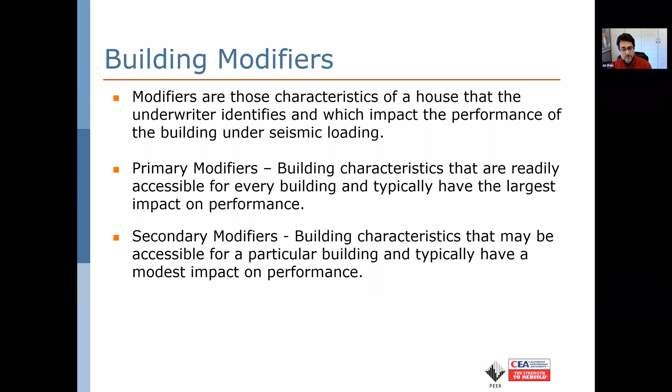Other modifiers, secondary modifiers, have a smaller impact. They may not be as easy to find or identify in the building, but they typically also have a smaller impact on the building. So this combination of primary and secondary modifiers is what we focused on.

The primary modifiers for all the loss modelers really focus on the location of the building, which identifies its seismicity and soil profile. As Greg showed, buildings in Bakersfield have a much lower seismicity than buildings in Northridge, so they may perform differently. Number of stories is another primary modifier. About 95% of houses in California are 1 to 2 stories, but the models typically allow for 1 to 3 stories. And then the age of construction.

The age of construction represents different types of construction codes, characteristics, the more common types of siding, and other things that would be on these houses. Each of the modeling companies has their own view of the appropriate bins of age, but we were able to come up with an age group that generally matched pretty well with the loss modelers.

Then the secondary modifiers - and I should say all of these things are something you should certainly be able to get for a house. Obviously the location, its address, the number of stories, and typically you can get the age as well. Secondary modifiers are sometimes a little bit more challenging to get, but nevertheless they can typically be developed by the underwriter.

The siding material - Greg presented this - wood, stucco, brick, other types of siding materials. The foundation condition, we focused on cripple wall homes and stem wall homes, because that was the intent of this project, not to work on slabs on grade. Building shapes - L-shaped, T-shaped, rectangular - and other elements like chimneys and porches. We specifically excluded that from this evaluation because we wanted to focus on the benefits of the cripple wall retrofit, so we didn't focus on other ancillary characteristics, but these are often things that are in the models.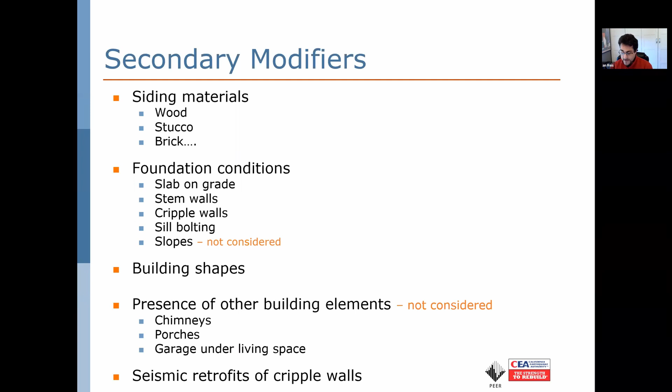And then typically whether the building is upgraded or not, or retrofitted or mitigated. Each of the models includes that as well.

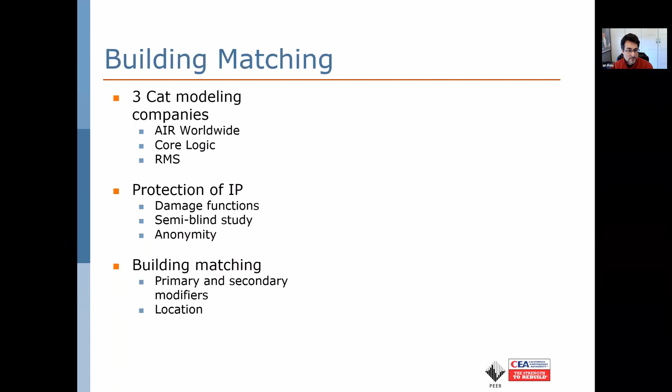Ideally we'd just love to be able to take the same things from the loss modelers and overlay it right on those curves. That would be the easiest way to simply compare them. But since we weren't able to do that, we created this way to calculate the equivalent annual loss.

By integrating the vulnerability function over the return period or annual frequency function, you get something called the average annual loss, or the equivalent annual loss, or the expected annual loss. There's different ways to categorize it. And so that's what we ended up producing.

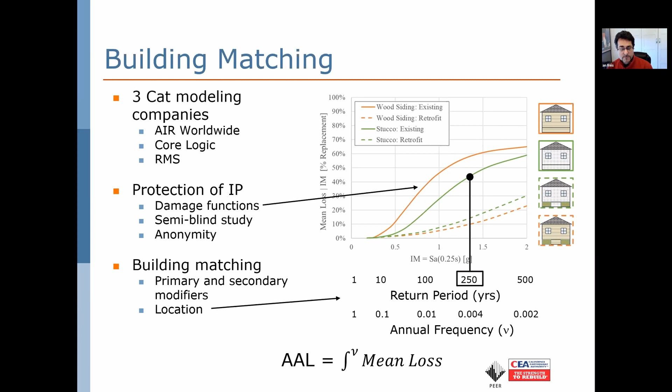We ended up producing for our results, and the loss modelers did the same thing, this AAL or EAL value. We also picked one return period, 250 years, where they would give us that information. With those two pieces of information we could make a good comparison between the models, but we weren't able to reverse engineer the damage functions, or for somebody reading the reports to reverse engineer them.

We picked 4 locations - Sylvia talked about this yesterday - representing different areas of seismicity in the state. We gave these locations directly the soil profile. We assumed Class D soil everywhere, and we gave these lat longs to the loss modelers.

Eventually we decided, as Greg mentioned, we had a couple hundred different building types that we ultimately considered, but in this study in particular we wanted to compare a subset of the buildings where we could match the CAT modelers' primary and secondary modifiers. We boiled it down eventually to 48 index buildings: 3 different age groups, 2 types of siding, 2 heights, 2 foundation conditions, and 2 construction conditions, retrofitted or unretrofitted.

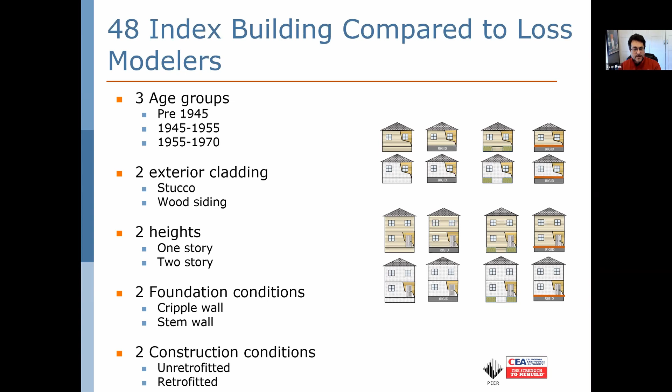These would match perfectly with the CAT modeler's own index buildings, their primary and secondary modifiers, with the slight exception of the age groups. There were some slight differences between the age groups of each modeler, but generally they were pretty close to these numbers. So these 48 buildings became the comparison set that the CAT modelers ran to give us the AAL and the 250-year loss, and then we ran as well.

Let me jump into some of the results we found here. The most important piece of information you should take away from this is that in the unretrofitted condition, we show substantially more loss than the CAT modelers do. Greg's talked about this. The reason behind that is the collapse of the cripple wall happens at fairly low ground motions.

You can see the average annual loss here. Blue will always be the PEER results, green will always be the average of the CAT modeler results. The solid bars are the unretrofitted condition, and the hashed bars are the retrofitted condition. You can see it jumps out immediately that there's a lot more loss in the unretrofitted condition, comparing the solid blue to the solid green lines. But you can see there isn't as much difference with the retrofitted conditions.

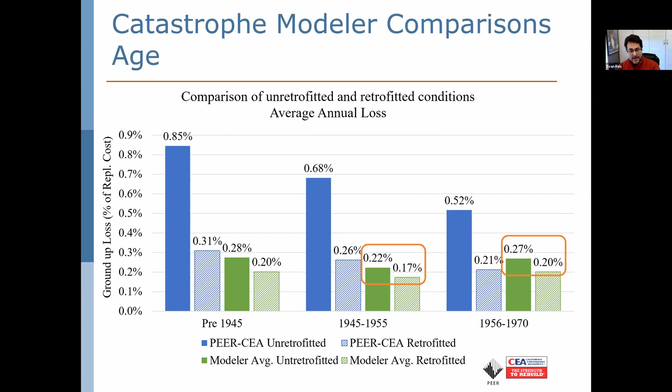There's a substantial improvement with the PEER-CEA models. There's not very much improvement shown with the CAT modelers, but in that case they actually come to more comparable results. So again, not a large improvement shown by the CAT modelers, and this is one of the key findings we had, whereas we get a very large improvement with our models.

Now we're comparing across all ages and cladding types, the 1- versus 2-story homes. You see an obvious bump in losses for the unretrofitted 2-story homes, and that's a function of the mass. In the unretrofitted condition, you have these weak cripple walls, and you're doubling the mass of the building. What we found is that cripple walls don't get stronger in older designs just because it's a 2-story home - it's not like they used 4x4 studs or two layers of sheathing. So it's essentially the same capacity with twice the mass, and the losses are substantially more.

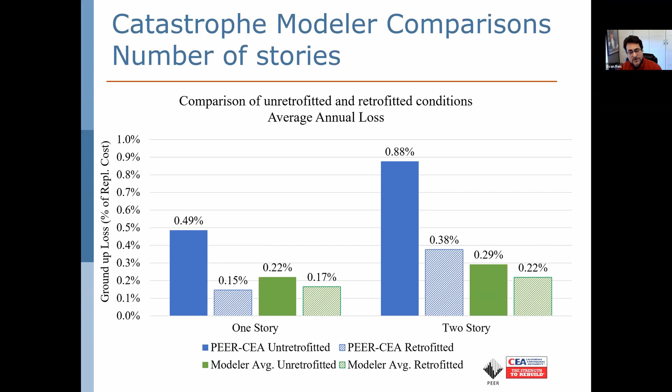Whereas there isn't that much difference shown by the catastrophe modelers, only from about 0.22% average annual loss to 0.29% - an increase of 20% or so - whereas with our models it's about an 80% increase in damage. So again, another interesting takeaway. But as we retrofit the buildings, you can see the comparisons get much better.

Okay, stem wall versus cripple wall - here's an interesting result. As Greg showed you, it really is the stem wall, the cripple wall condition where collapse of the cripple wall is the biggest issue, and you can see that here. The stem wall houses perform quite well. In fact, retrofitting the stem wall houses doesn't improve their average annual loss by a lot, but it obviously does with the cripple wall homes. And you can see too that the stem wall homes compare very favorably all the way across the board with the loss modelers, whereas again we have this issue with the cripple wall.

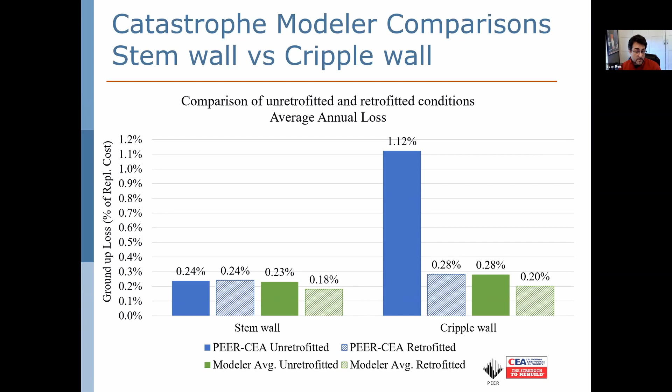So if you consider the level of - what has come out of this, and I'll show this in the summary of results, is that the CAT modelers tend to underpredict damage relative to what PEER-CEA is predicting.

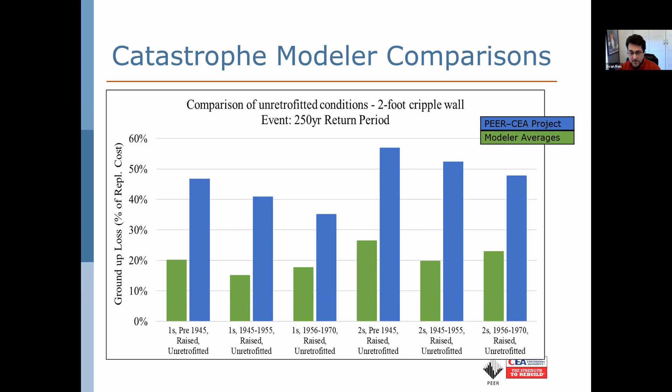You're getting maybe a 20% benefit for retrofitting the home, whereas with the PEER project, you're getting a 70 to 80% benefit for retrofitting. So this was an important consideration as well.

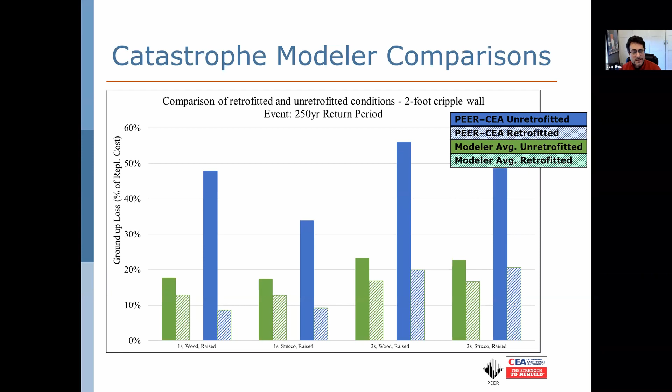Similar kinds of benefits at the high return period event - the big one, if you will. This is the kinds of results that we were getting - again, much clearer benefit for retrofit than would be indicated through the CAT modeler.

So to jump into the key findings in my last couple slides - this issue when you have a 2-foot cripple wall, unretrofitted, the modelers consistently estimated a lower damage of both average annual loss and at the high return period across all the age groups, heights, what have you, with respect to the PEER–CEA models. So our analytical models coupled with the testing really showed that the collapse of the cripple wall is an important consideration that may not be properly or fully accounted for in the models.

Both groups obviously estimated more damage for a 2-story home than a 1-story home, but we determined that the mass difference was pretty substantial, and so the difference in performance between 1- and 2-story homes was more pronounced than the difference that the modelers predicted.

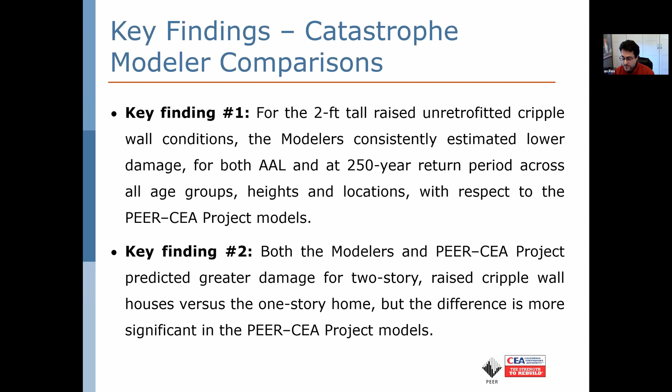Okay, so for the stem wall conditions, the PEER project really estimated very low damage. And in this case, the CAT modelers predicted slightly higher damage for the stem wall conditions than did we.

Part of the reason is that part of our testing and research on these unbolted stem walls, where you have a sill plate that isn't bolted, we found that the wet set condition where these sills are maybe spiked with nails and then set into the wet concrete actually provides almost as much resistance as bolting itself, so you get this failure mode where the joists pull away from the sill plate itself, and so there's still a substantial amount of strength.

In the retrofitted condition, however, we both found fairly good agreement, the modelers and our project, and that really goes to show that you don't get a lot of damage in the upper stories when you have the retrofitted condition, because there are a lot of interior walls, there's a lot of redundancy, so maybe these houses are really pretty good, all things considered, once you've retrofit the cripple wall.

Okay, let me go up one more time. The fifth finding, which I mentioned briefly yesterday, is that the PEER project showed a consistent improvement in performance with age. So the losses were higher for the older houses and lower for the 1945 to 55 houses, and then lowest of all for the 1955 to 70 houses.

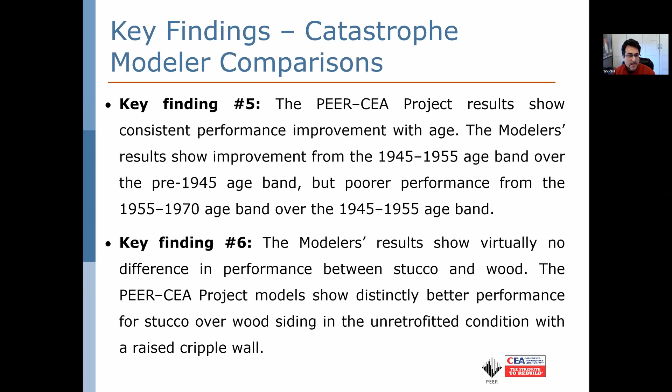That's all I had to say, except that I wanted to reiterate one thing that both Bret and Greg mentioned in terms of future goals: working more collaboratively with insurance companies to get claims information and underwriting information. I hope the modelers will agree this was successful, that researchers can play nicely with the insurance industry. There is so much more we can learn if we have access to anonymized inventory and claims data. I hope this will encourage the insurance industry to be more forthcoming and collaborate with researchers going forward. That's all I have.

Thank you so much, Evan.